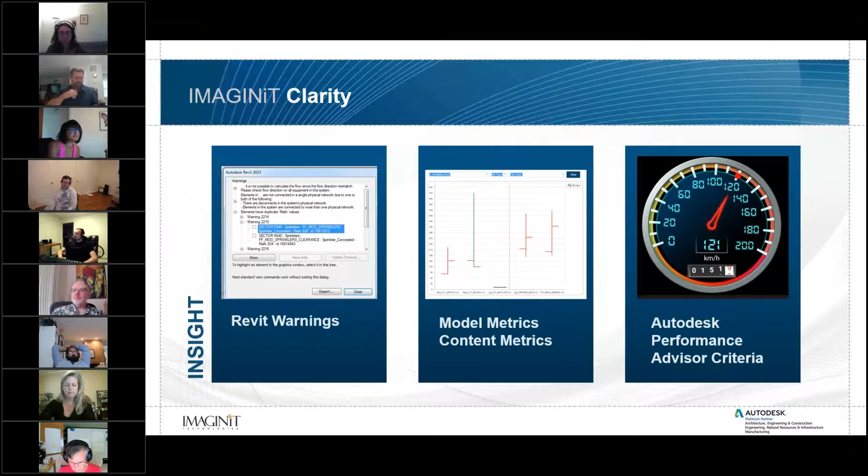On the Insights tab, Revit warnings: it's extracting all that data for you and displaying it in one central location. You can think of it as one single source of truth with all the information about your project, showing diagrams about content metrics, file sizes, and so on. It will help you optimize the performance of your models by pointing out issues within your model so you can go in and fix that and move forward.

There are different ways of displaying the data. You can look at single models, as you see here on the right, or you can look at graphs, as you see here on the left side. If you're a graphical person or you like to read through information, you have the ability to do so. You can also extract this information and read it in Power BI or Tableau to get that information that way.

Do I feel a question coming? No? Okay.

Other ways — what we're starting to do, and release 2021 is focusing a lot on this — is the customization of BIM standards. The way we look at BIM standards is by starting to put configurations for what makes a good model and what doesn't. For example, what you see here on the right is a dialog box where you can go in and put in information about what tolerance you have for the number of warnings you would want in a model.

Anything up to 100 warnings gives you a green check mark, so you're kind of scoring the models that you're looking at. Anything between 100 and 200 gives you a yellow check mark on your model. And then anything above 200 is going to be red, so visually you can look at that information right away.

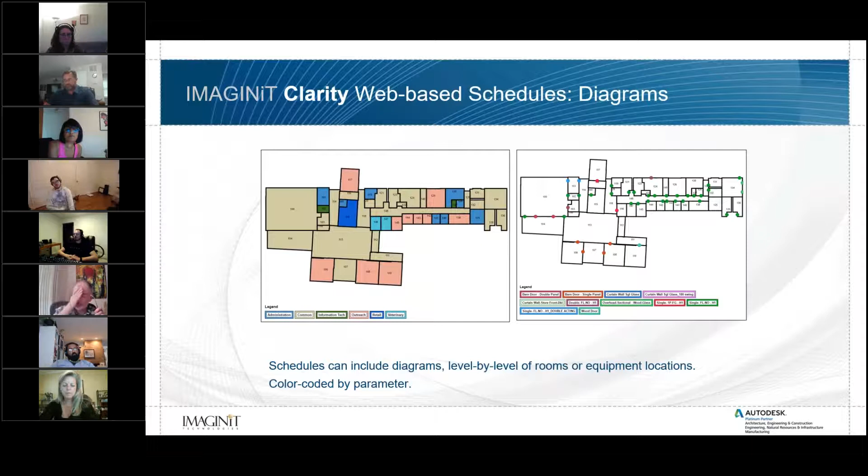So as that non-Revit user, you have the ability to open this on your cell phone, on an iPad, or on your laptop or desktop if you're spending more of your time in the office. You can extract or look at this information as you're going through and getting to a meeting, or possibly being in a meeting.

There's different information you can extract out of the models, and we'll go through a live example of this where you can look at either furniture information in your model, or you can look at the entire room. You have full flexibility of what you want to look at and how to extract that information out of Revit and display it in your Clarity platform or interface.

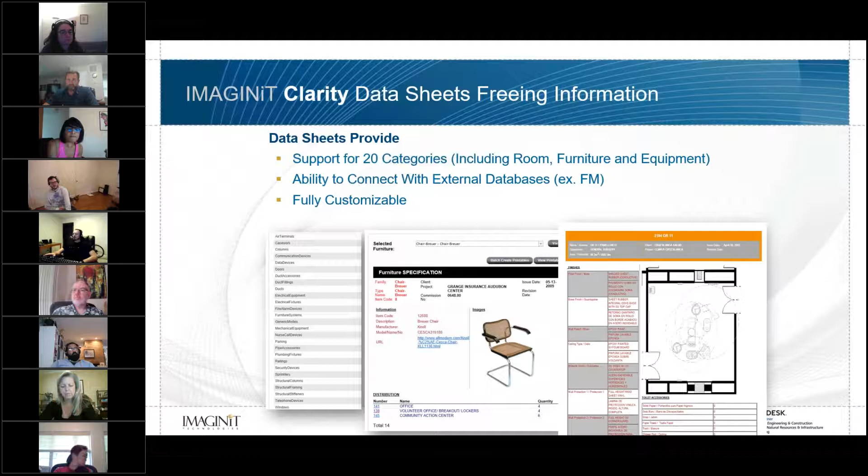Let's get started now and run a demo.

All right, let me just get this out of the way. Typically when you open Clarity, you'll see a page like this. Let me know if you guys can see this—is it lagging at all, just because of the bandwidth?

No, we're good? Okay, all right, so I'm just going to log in with my username. Typically you'll see this page. This page will probably be the most familiar page to you as either a Clarity customer, or if you're looking at it for the first time. You'll see this page where you can, at the top here, place your company logo.

These tabs here are very important—we'll get into that—where you can look at different aspects of the Clarity service, or the Clarity modules, if you want to think about them that way.

On the left hand side here, you have your different projects, so you can tag them if you're looking at 2016 projects, or you want to only see projects that are on the cloud. You have the ability of clicking on this tag and it will filter out by those projects. These are dynamic, but at the same time you can go in and add or customize the way you want these tags showing.

These are the projects that already exist on this Clarity interface. If you want to add a project, it's right there—click on that, and then you're in the process of adding a project. You have different ways of looking at the projects, and it's just spinning here.

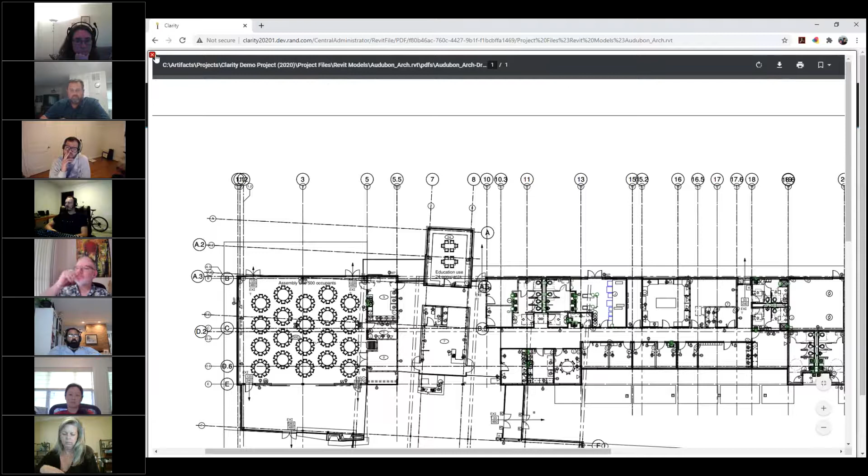You'll definitely need internet access to be able to see this, but on your cell phone you're carrying that everywhere you go. If you want to print it out, you have the ability to print it out and download it. So countless opportunities of having this either offline or right off of the server itself.

Also, what I can do is if I just go back to files and click on the architectural model right here, you'll see there's a PDF folder. If I click on that PDF folder, you'll find all of the PDFs right here. These are, again, tasks that you've run at a certain time.

What it's doing is it's storing that information here for you, so that if you ever need that information, you can click on this, click on the model or the file itself, and then you'll find the PDFs that you've created.

IFCs and DWGs, if you did run that, you have the ability of having them here. The task can also post these to a certain location, like BIM 360 or SharePoint. Wherever you want that to exist, it will send the tasks there.

Looking at the tasks tab, notice that this is the task that I launched. If I click on refresh here, it still didn't get picked up by a task server, but it's still there. It's waiting, the status is new. It's just waiting for a task server to pick it up, and it will move forward with it.

Looking at the different tabs here, I'm not going to go through all of them, but I'll go through a few important ones. Looking at completed tasks, it will show you the tasks that have been completed and tasks that possibly failed for some reason. As you're going through and looking at the tasks that failed, you can click on this ID right here, and it will give you some information about why this task failed, for example.

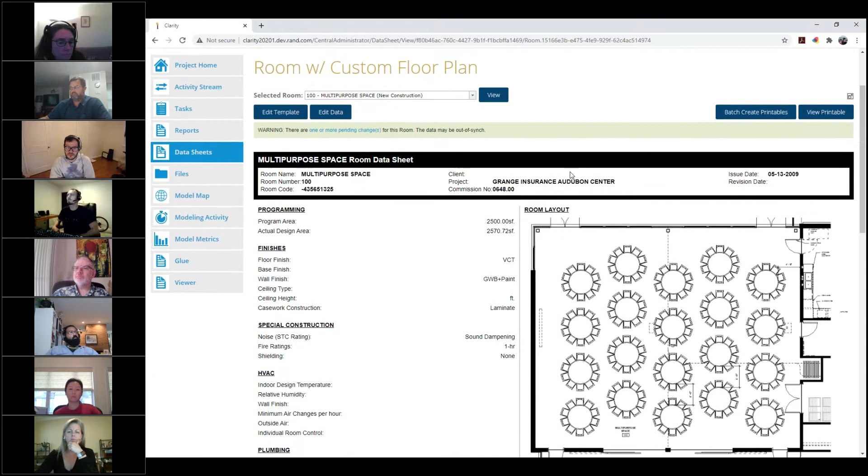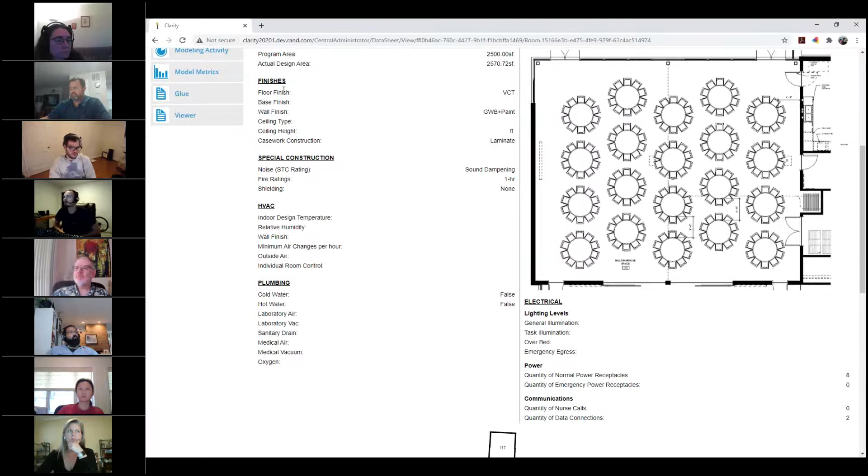Notice that this is how you're going to be reading the information coming from your data sheets. You have the ability to print it out, but also this is how you see it, a nice custom view of that floor plan or room. You're looking at all the information, what the program area is, what the actual designed area is, and all of the finishes, and so forth that is in this model.

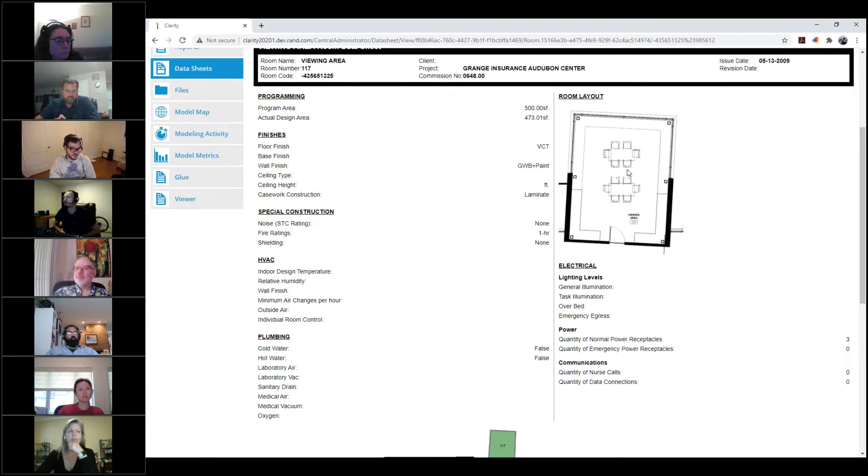The beauty of this is you have a key plan looking at the entire building. So from this page, I can switch to other pages by clicking on any of these rooms over here. If I click on 117, as an example, it's going to switch me to that room, and now I'm looking at that information within my floor plan. It highlights that information, giving you a good key of where you are in the building, and so forth.

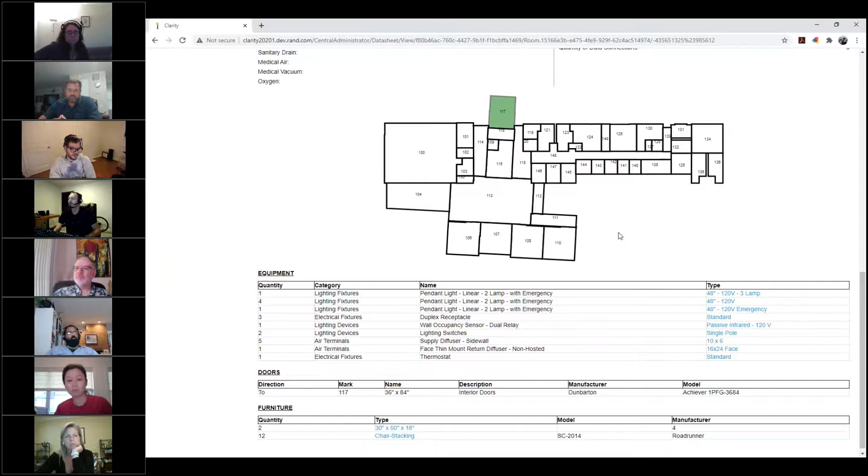Again, all of this, you have the ability to access through your laptop, your iPad, or your phone.

Getting into the reports, clicking on, possibly, let's see here, the door schedule. I think everybody likes doors, so let's look at that.

So looking at this door schedule right here, all this information has been extracted from our model. You have your element IDs here, so if you need to search or investigate where this door is located in the model, you have the ability of doing that by doing the search by ID.

But also the beauty of this is you're looking at all this information. Now, as a project manager looking at this, what I want to do is make some edits. You have the ability to go in and edit the data.

Once you have the data edited, you can click on update, and as you click on update, you'll see this green highlight within the schedule itself. Now that is sending a request to update that information in the Revit model.

All of this is controlled by permissions, so the person within the Revit model needs to have the right permissions to look at that information and say, okay, I accept this, I grant you the change. Then the family will update automatically within the Revit model.

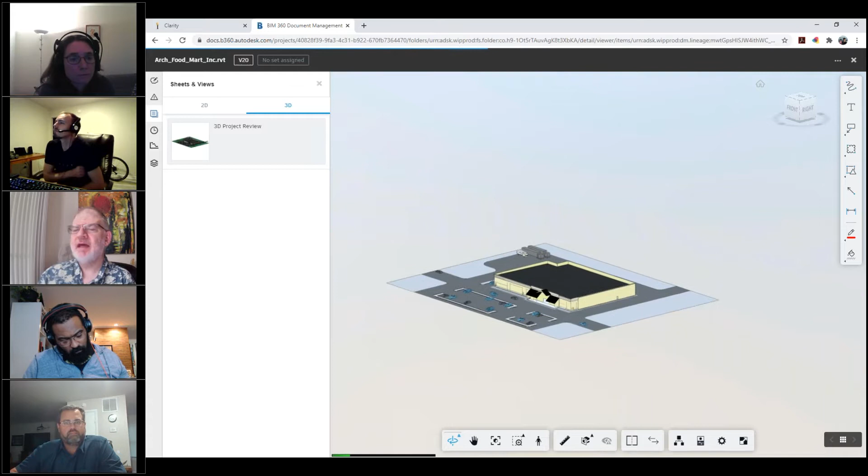So I know that you had been using Revit Server, and you still are, because it has that level of security you need. I guess BIM 360 is working on getting FedRAMP certified, but we don't know where that stands. The other solution we're working on is Microsoft Azure, and we should have that up and running soon. I asked some of our IT people about that and they didn't understand, but...

So you're saying there are ways? They basically said we do work with the American government, Canadian government, I mean, India, we work with all kinds of governments, and apparently there are ways to secure it. I don't know how to explain, but it's something we can't get around.

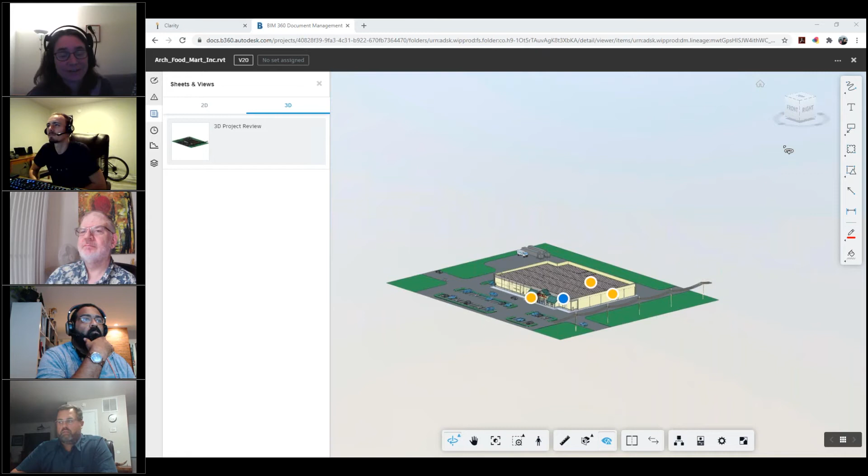Well, we certainly have. So what I sent you earlier about Clarity is off our resources page. If you just hit that link and then back out of that, you'll find BIM 360. There's a ton of demos that we've recorded, but this is always a better environment when you're one-on-one with the presenter and you can ask specific questions.

So if that's kind of what the group would want, I'd be happy to line that up for you. I think usually the Clarity and the BIM 360 guys are the same guys, right, Esmail? That is correct. Scott Burke is the guy I usually work with, but he was on vacation today. Yeah, Scott Burke, he's also the BIM 360 guy.

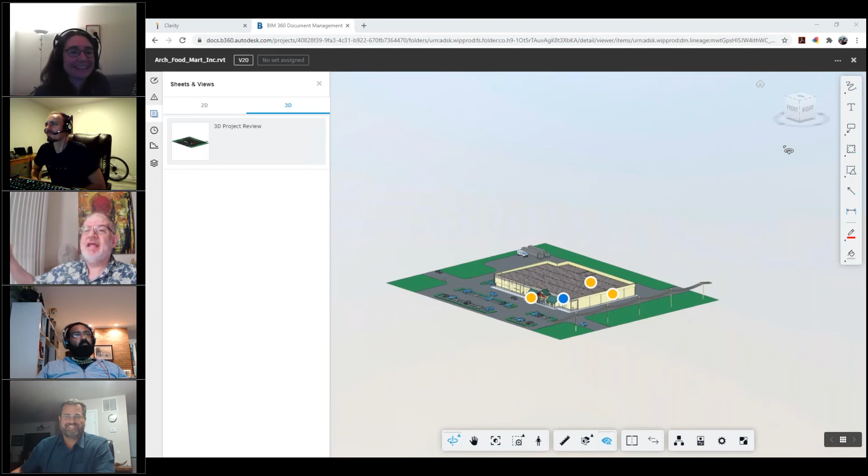And it's like, oh, that's easy. And then how do you do it when you didn't know how to do it? I can't—he's never talked that much.

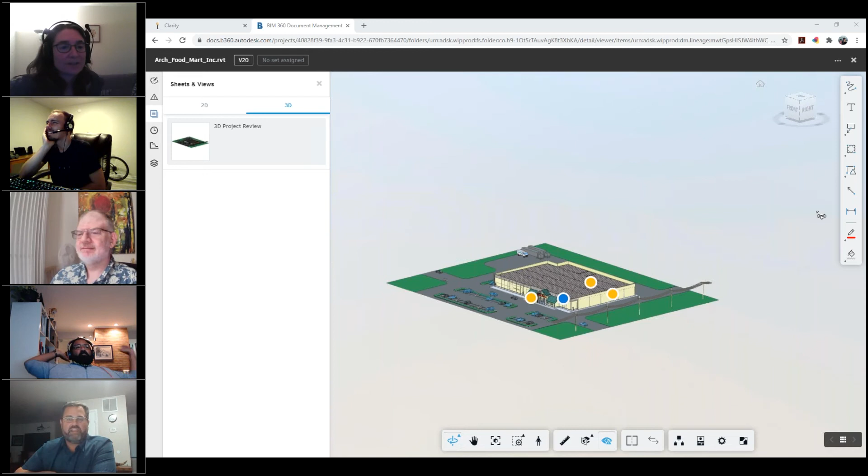It's like a Stephen Hawking bad dream. You're going to have to watch the recording of this presentation, Matthew, so you can hear what your voice sounds like. It's like you're on auto-tune, and I can't make it out. I think I only understand maybe 10% of what you're saying.

That's all right. I'm not saying I want you to leave, I just... I know we are running really over, but...

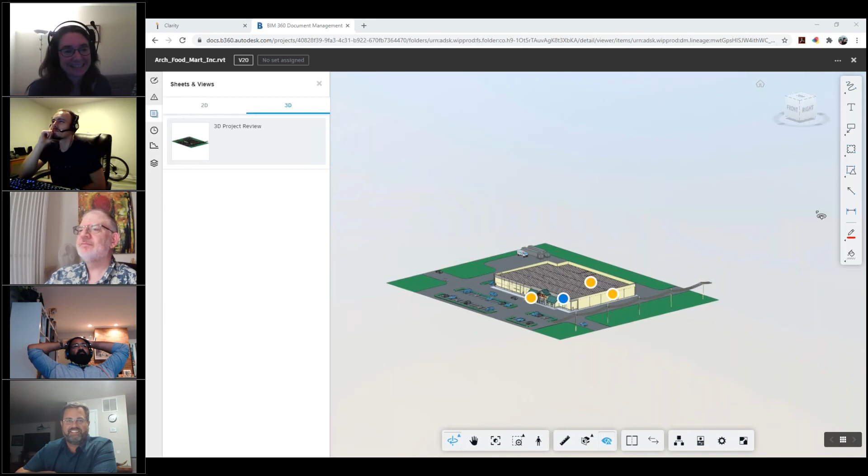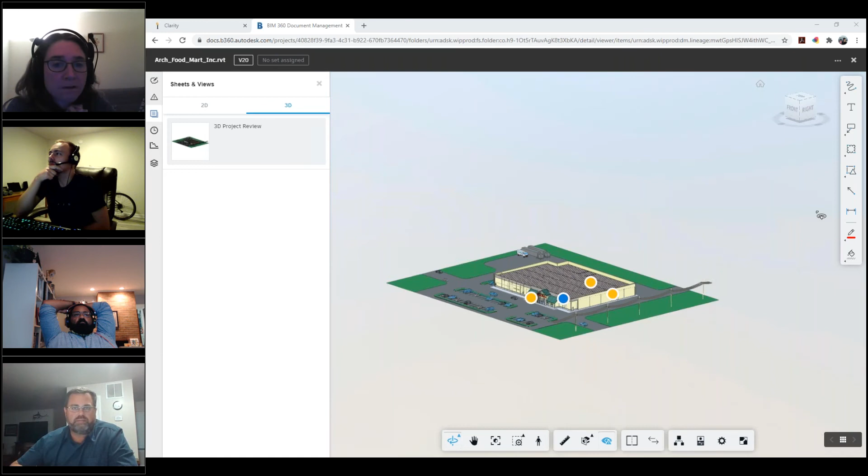So anyway, let's go ahead and plan on a BIM 360 presentation for November. And I agree, yeah, if you can get Matt, if you can get somebody lined up from Autodesk, that'd be awesome, or Scott Burke, I mean, piece of cake. Okay, I would, or even for that, I would get one of my guys because I have an avenue just to do that.

I feel like not just scratching the surface either, but really getting into the issues we have on a daily basis, like when the rubber hits the road working on a real project. That's why if we can make a list of the things we want to make sure get talked about, that would be great. Because I still panic once in a while when somebody comes to me with an issue and I'm like, oh my God, I have no idea what to do about this. It's like I'm the last one, thank goodness, because there have been so many times when I'm like, I don't even know what to do.

So, Gladys, can I go back? Gladys, submit the request, please. I can't believe Gladys is still on the call. Poor thing, she's like, these people are crazy. Sorry, Gladys, I hope she has a drink. Hello. Yeah, I'll submit the resource request once I get the date locked down.

And I guess if we're going to share the recording of this meeting, we're going to have to cut out the end part. No, leave it, leave it.